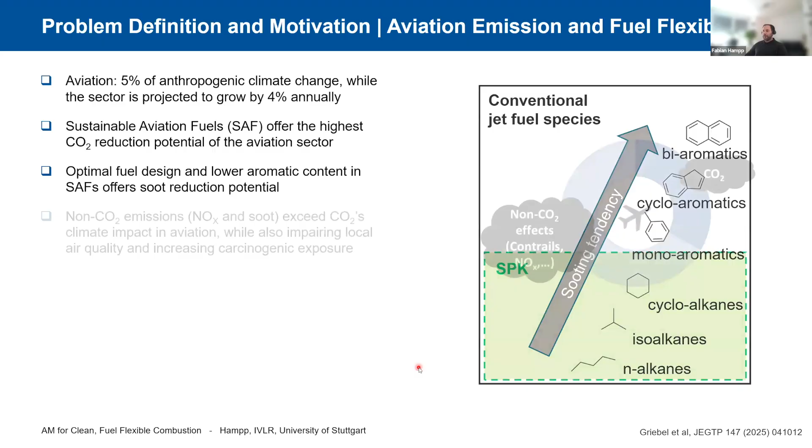This is quite important because it's well known that non-CO2 emissions basically exceed the CO2 climate impact in aviation, but this also affects or impairs local air quality and increases carcinogenic exposure. When we use SAF, also hydrogen, that still leads to contrail formation and NOx formation. So using SAFs alone doesn't make aviation climate neutral.

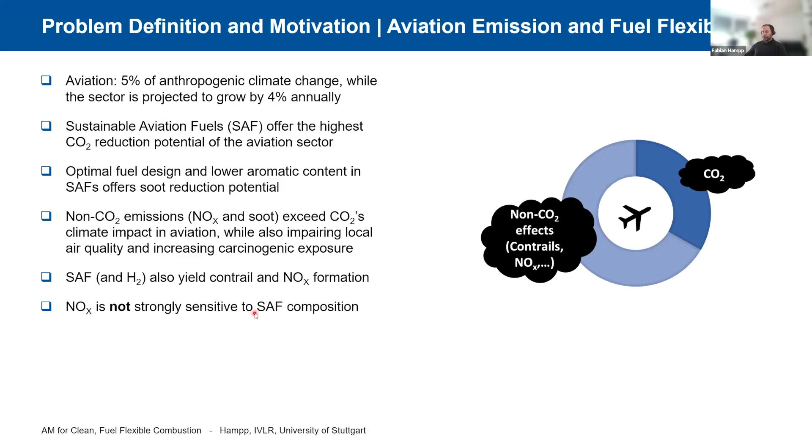In order to mitigate, in particular NOx, we need technology advancements. NOx formation is not strongly sensitive to the SAF composition, so when you remove, for example, the aromatic content, the temperature is still high, you still form thermal NOx and so on. The same holds for hydrogen. So for reducing NOx, we really need technological innovations.

The second side I want to motivate is the use of additive manufacturing in combustion systems, in particular because modern combustion systems are often additively manufactured. For example, the Siemens SGT 600 or 800, or also the CFM or GE LEAP engine fuel nozzle. The motivation here is often a reduction in part number, weight, and also manufacturing time.

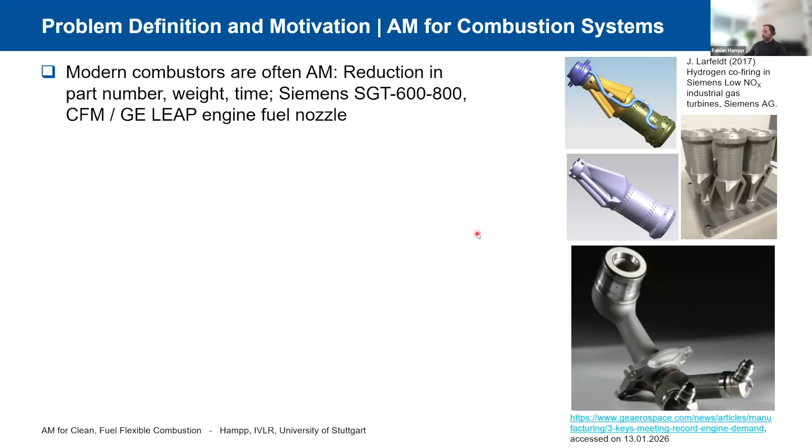But additive manufacturing can go significantly further. Here I show an image of a multi-material printing process, borrowed from Fraunhofer, where they combine the printing of copper with stainless steel to combine enhanced heat transfer and structural integrity.

This can go even further, up to in situ alloy generation. Basically you fuse or blend powders, or create new powders, and then really create, in the printing process, new alloys tailored for their functionality in the position where you place them.

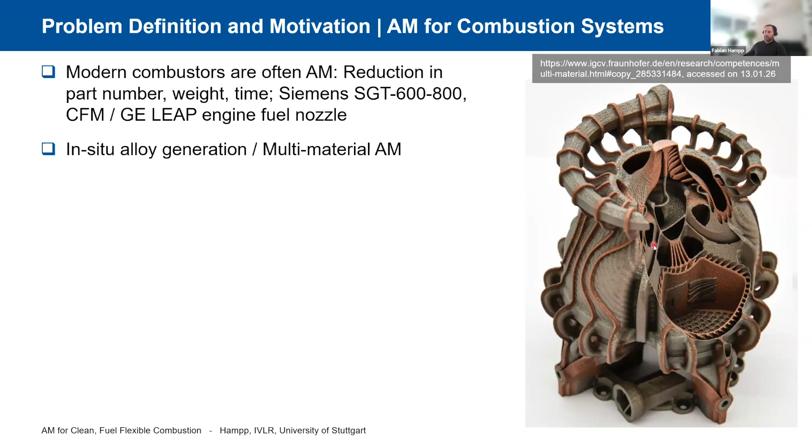Additive manufacturing is also heavily used for repair of in-service components. This is more direct energy deposition, where we basically rebuild turbine blades or compressor blades to fix them.

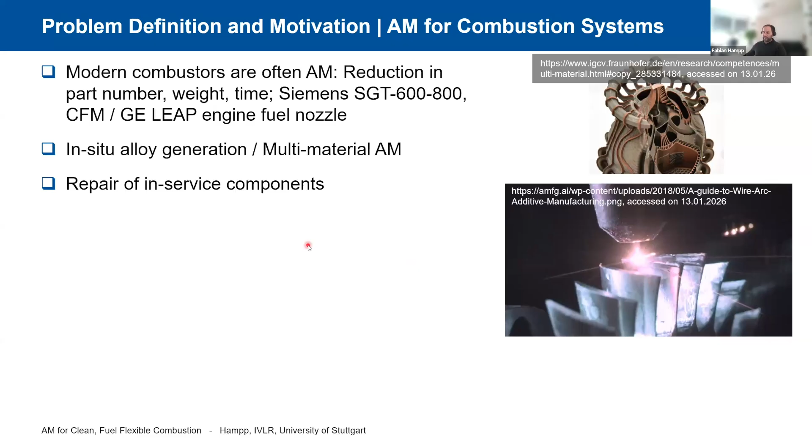One big area I want to highlight is function integration, particularly the DFG-funded SPP 2419 HyCAM project run by Heinz Pitsch, where we have a sub-project. This overall project focuses on the use of additive manufacturing for hydrogen carriers, with a wide range of projects focusing on performance gains via geometric optimization.

Our project is also focusing on utilizing enhanced surface roughness to activate ammonia cracking. But what I want to focus on today is basically the use of additive manufacturing to enhance mixture homogenization, fuel flexibility, and also mitigate emissions.

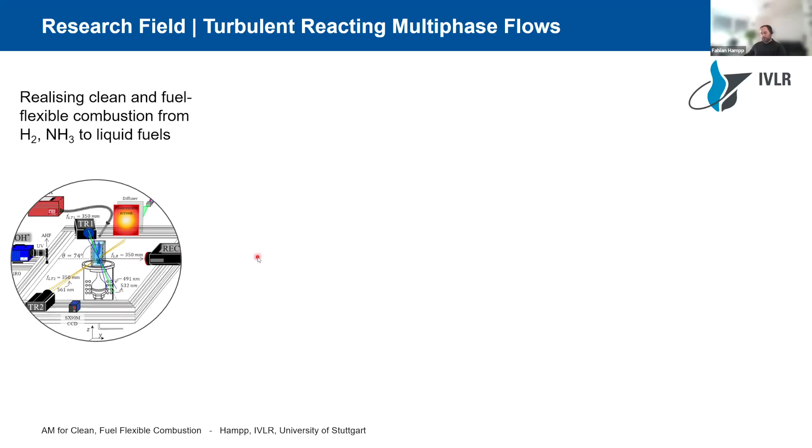The research field we work in is a bit wider, so we focus in general on turbulent reacting multi-phase flows. We want to realize clean and fuel-flexible combustion, ranging from hydrogen and ammonia, with particular focus on liquid fuels. We advance fundamental understanding and use advanced manufacturing technologies to optimize injector hardware, designing flow components to allow us to decouple physical processes better, to end up with cleaner combustion processes.

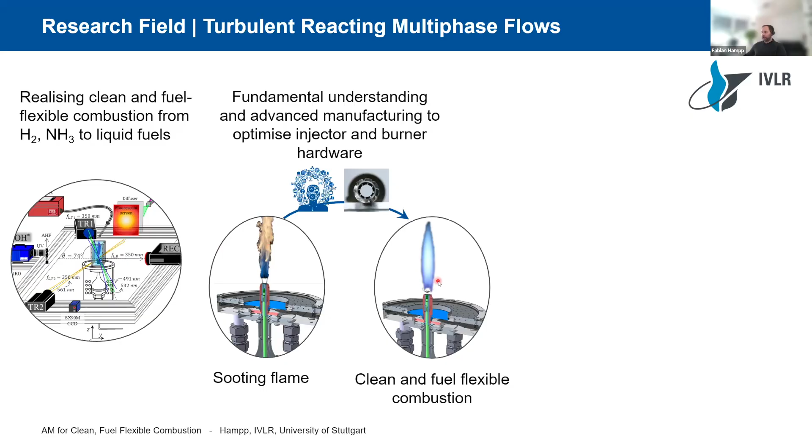For this purpose, we use a lot of laser-based diagnostics that produce a lot of data. In order to post-process this data and advance this post-processing, we develop deep learning-based methods to support the data analysis of image-based diagnostics predominantly.

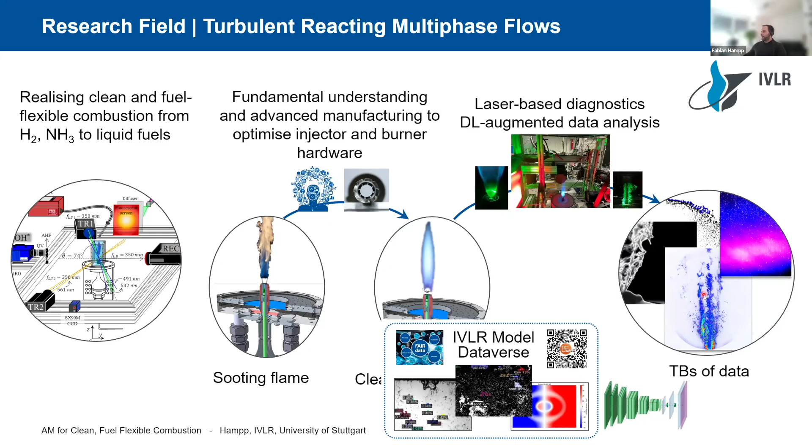But the focus of today's talk is basically on this additive manufacturing side, the way we use it to optimize combustion systems. So before we deep dive into the content, I want to introduce quickly additive manufacturing and then focus on...

...the experimental work we do and show you some examples of injection systems that we have developed over the past. Then in the end, I will highlight where I see the emerging challenges for the use of AM in combination with combustion.

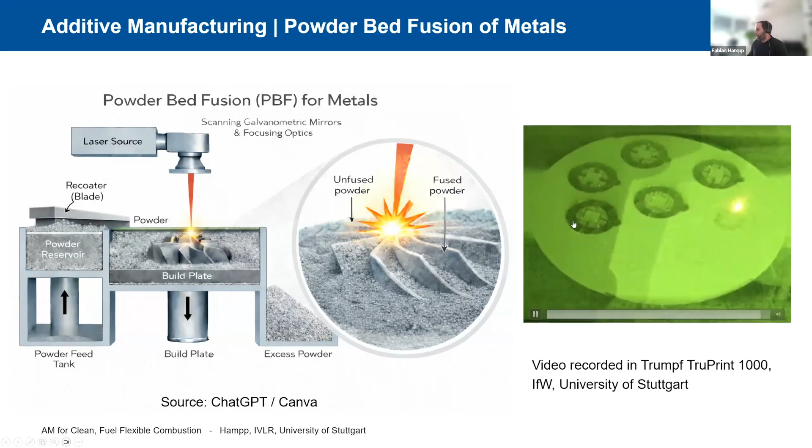Good. There are a couple of inherent problems with that, in particular when it comes to smaller scale structures. The inaccuracies I'm going to talk about now always assume that you already have a good additive manufacturing process, so a stable melt pool.

On top of that, you have partially melted particles, so partially fused powder material sticking to the wall, enhancing the surface roughness. The second part is tolerances.

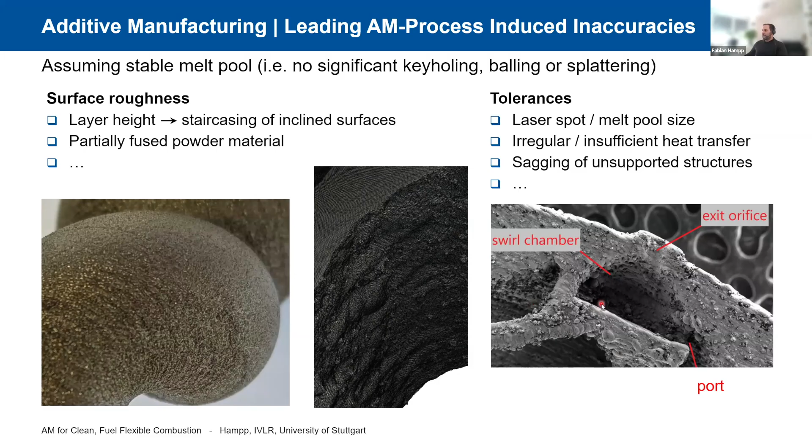And why is this important? I just want to give you a rough idea of the precisions we talk about in additive manufacturing powder bed fusion. For solid structures, in order to create a wall, you need roughly 2 to 4 melt pool widths. This leads to a minimum wall thickness usually above 500 micrometers. These numbers are really just to give you an idea of the range we're talking about.

And for channels or internal structures, the quality or accuracy is heavily dependent on the build orientation. So vertical holes, you probably get a much better quality in comparison to a horizontal channel, due to this sagging and unsupported structures.

Typically, the dimensions are also bigger than 500 micrometers, and every channel that is bigger, or especially horizontal channels bigger than 5 to 10 millimeters, needs support typically. When we talk about injection systems, this can become problematic because usually you have multiple injection orifices fed out of a single plenum. You have complex internal structures that you can't post-process, can't machine or sandblast, and you have high flow velocities through these orifices, making it sensitive to dimensions.

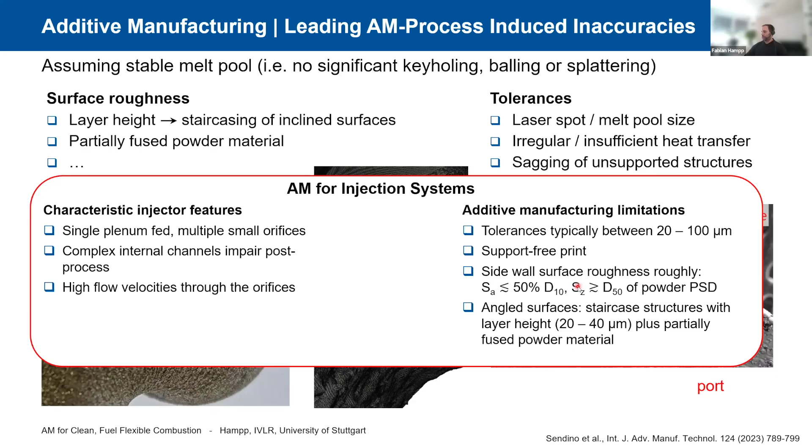That's not uncommon. And when you have an angled surface, on top of the surface roughness you also have the staircasing effect with the layer height, and typical layer heights are between 20 or 40 micrometers, depending on the optimization of the build process - they can also be higher. When we have an injection orifice of 200 micrometers with a tolerance of 20 micrometers up and down, that leads to an area uncertainty of 50%.

That's problematic because, of course, if you have one pressure in the plenum, and now we have a variance of the injection orifice that varies 50% in area, that leads to significant differences in fuel being ejected through these orifices. That inherently impairs mixture stratification, leads to elevated non-CO2 emissions, and is challenging to reproduce because in the next part, presumably, these inaccuracies will be distributed differently.

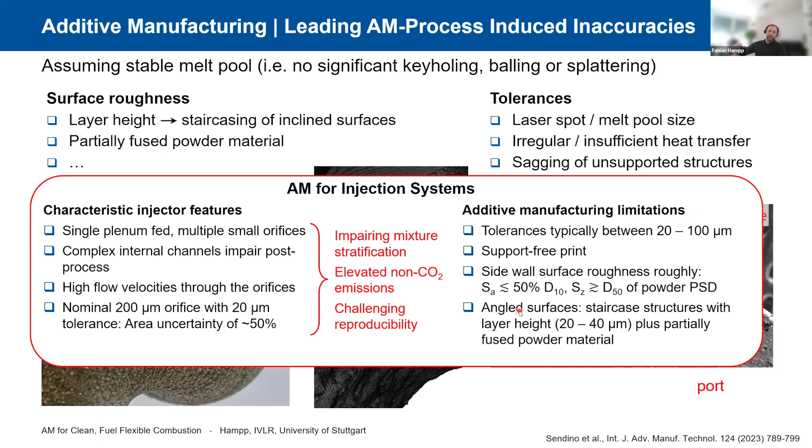But you can detune this angle to 45 degrees or 90 degrees, and then you end up with some sort of structure in this build layout.

The second parameter that we vary a lot is the hatching distance - that's the distance between the laser path lines. Typically, if you want a solidified part, they overlap and you create a solid part. But when you detune that and open the space between them, you create gaps. In combination with hatch distance and rotation, you can basically tailor the permeability vector.

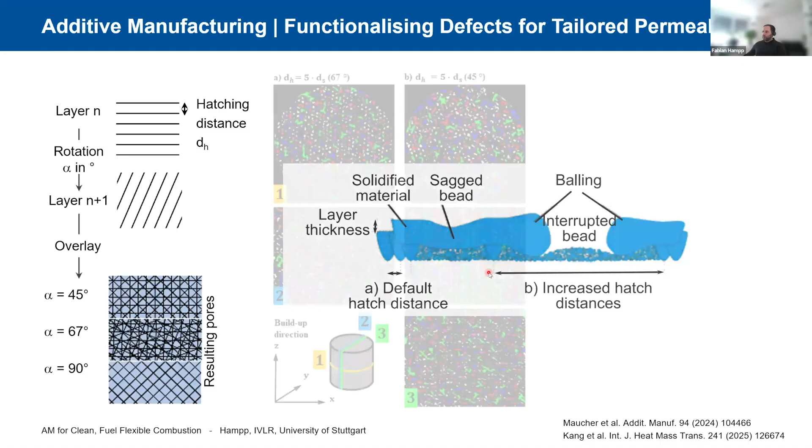You can direct it. For this, I'll show you a few micro CT images. Here you have a scan strategy of 67-degree rotation and here 45-degree with a hatch distance of 5 laser spot diameters. You can already see by the interconnected colored regions that with a 45-degree rotation, the connected pores are much larger compared to the 67-degree approach. When we increase the hatch distance, we can create really large interconnected pores, and that creates permeability that is directed in these structured approaches.

This is what we use later on in designing the new injection systems.

Let's move to the combustion side. I will introduce the burner framework and experimental setup next. We typically use jet stabilized combustion systems, highly turbulent jet flames, approaching the flow conditions of high momentum jet stabilized combustion systems. The way this works is you have air penetrating at high velocity into the combustion chamber. The combustion nozzles are placed off-centered, which creates space for a large internal recirculation zone that transports heat and radicals back into the shear layer, and it's entrained into the shear layer, leading to some sort of auto-ignition influenced flame stabilization.

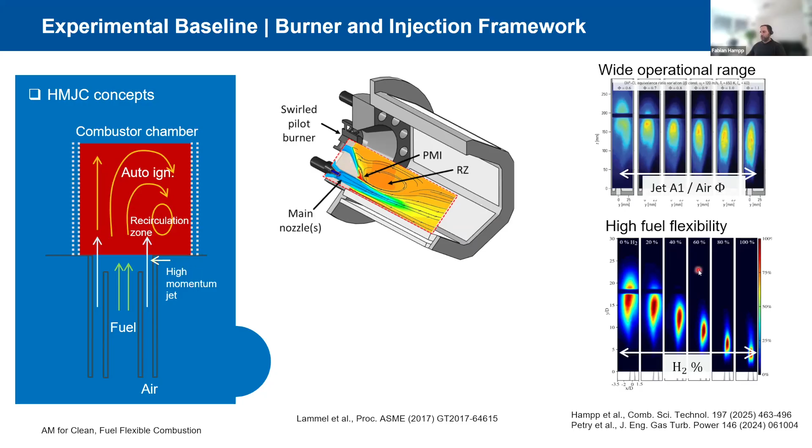We choose this combustion concept due to wide operational range and wide fuel flexibility with simultaneously low emissions. Here you see a Jet A1 flame for varying equivalence ratio, and here a hydrogen or natural gas enriched hydrogen flame, or methane enriched hydrogen flame. The flame stability is very comparable - the flames are always lifted, and you can operate the same burner from hydrogen to heating oil and kerosene.

When it comes to the injection systems for these types of combustors, these are rather challenging because you need to split up the fuel mass flow rate into a large number of nozzles. So instead of having one injection system for a given thermal power, you now have 12 or even more injection systems, and that makes it rather challenging to produce these.

In terms of liquid fuels, we use jet and cross flow injectors either as a direct injection system, as a pre-filming system, or as air blast systems. For gaseous fuels, we typically use jet and co-flow or jet and cross flow injection systems. These are quite common, and they're also mostly additively manufactured, but there's nothing extraordinary about these except for maybe the geometry.

We use additive manufacturing in this micro print approach to develop new types of injection systems with the motivation to enhance fuel flexibility, load flexibility, and also scalability.

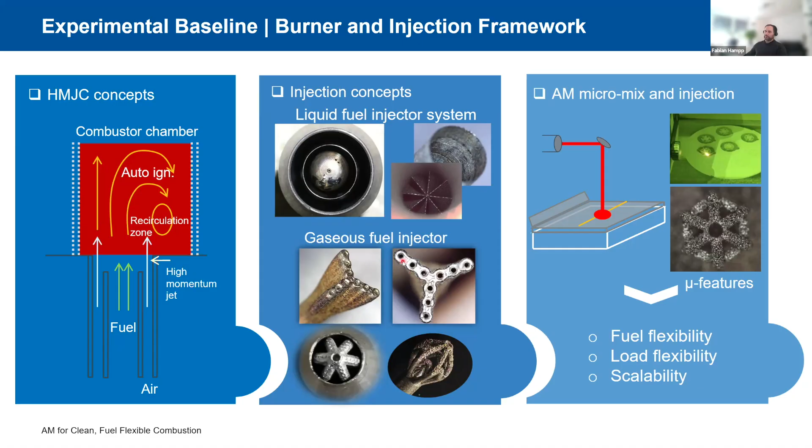With this, I would now like to introduce the burner configuration. As I said, it's a turbulent jet flame. In our burner it's a piloted turbulent jet flame. We have the preheated combustion air coming up in this channel. We have in green the fuel supply lance, on top mounted an injector. Here you have an air blast wall installed in blue surrounding the injector, and then in red you have the combustor nozzle. Down here you have a porous plate that anchors the pilot flame, which is then surrounded by shield air. I think this will become clearer when I show you some images.

The flow conditions we operate at are typically between 30 and up to 160 meters per second bulk velocity. The temperature of the air varies between 300 and 800 Kelvin.

The fuel is supplied by nitrogen pressurized piston cylinders that make it fluctuation free. The fuel supply lance is water cooled up to this point to maintain the physical fuel properties constant. The fuel mass flow rate can be varied over a wide range, from let's say 0.05 grams per second to 1.2, although we can also go higher and somewhat smaller here as well.

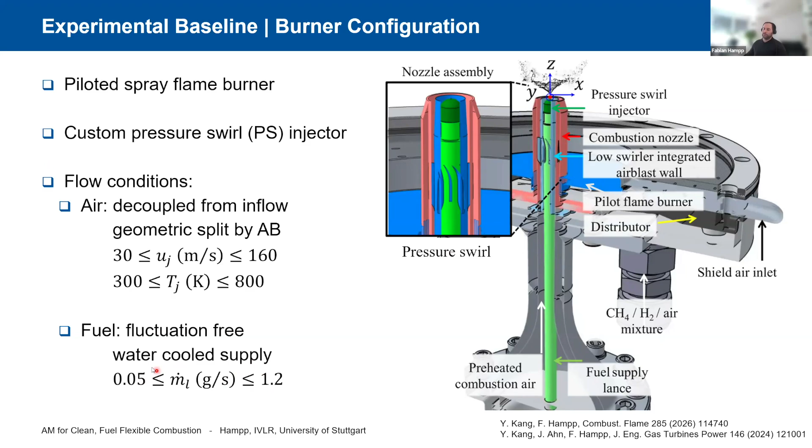Before I start with the way we use additive manufacturing concepts in this type of burner system, I would like to introduce or explain the overall injection system.

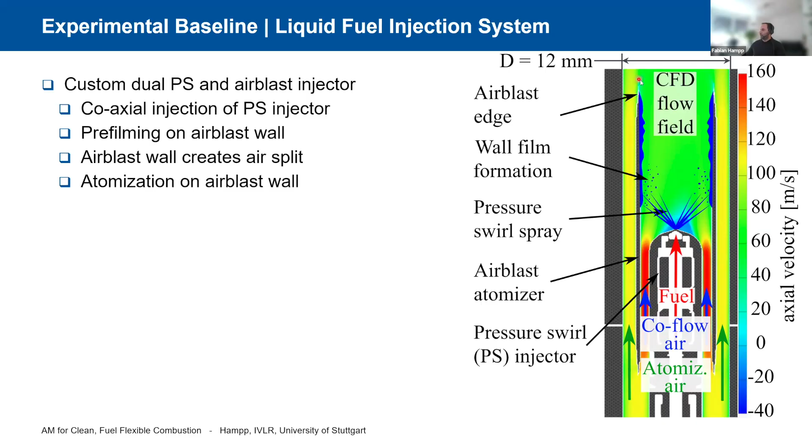So we have the pressure swirl injector here that creates a hollow cone spray and pre-films a wall. This wall film is then driven up by a co-flow air going past, meeting an atomization air at the air blast edge, and the flow rates are adjusted so that you have high shear leading to this air blast atomization. It's a very modular design, so we can exchange the injection system, vary the mixing length—the distance between this edge and the combustor nozzle exit—vary the length of the film, and vary the air flow guiding system around these injection systems, and also upstream of that.

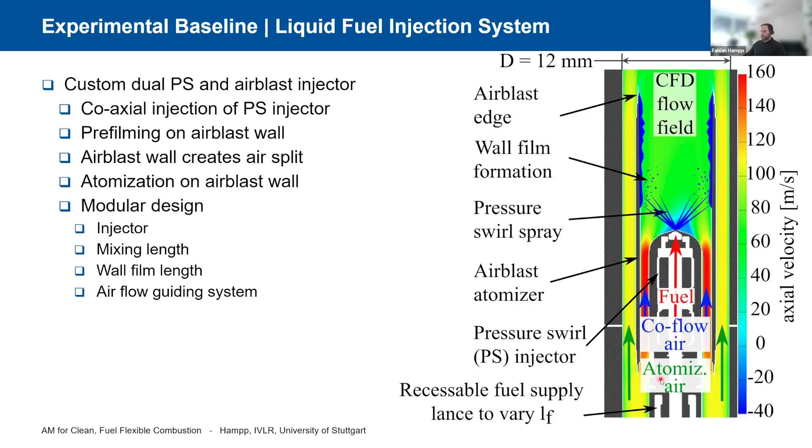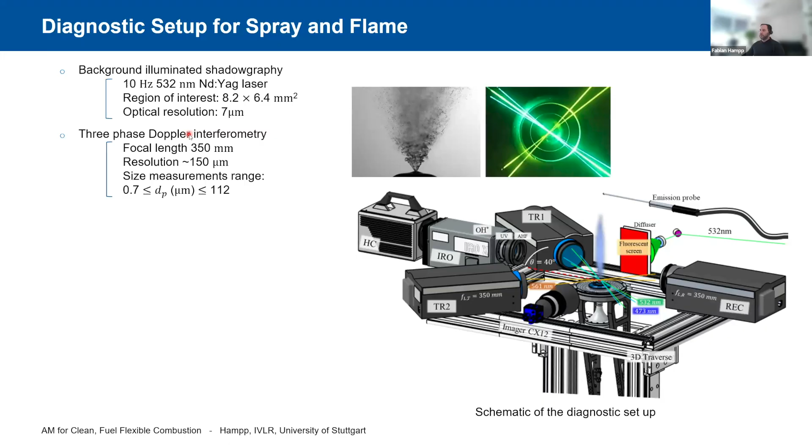In terms of diagnostics, let me give you a quick introduction to the baseline diagnostic system that we use. We use background illuminated shadowgraphy to quantify the primary atomization. We use three-phase Doppler interferometry to measure droplet size statistics and also droplet velocities. We measure high-speed and low-speed OH chemiluminescence to detect the flame position and flame anchoring process. And we measure NOx or exhaust gases with an emission probe.

We also use more sophisticated laser setups, from phosphorescence-based PIV to do thermographic measurements. We use laser-induced fluorescence for fuel vapor, OH, and soot precursors. We are in the process of setting up LII, but this will take a little bit more time. The current talk will focus on the kind of diagnostics that I've shown here.

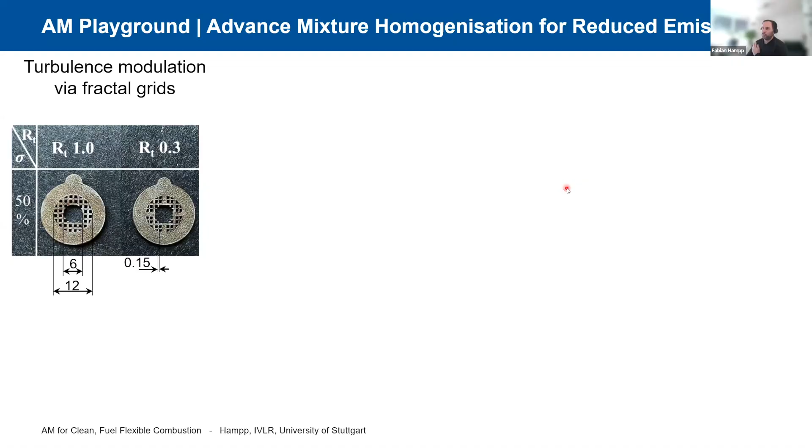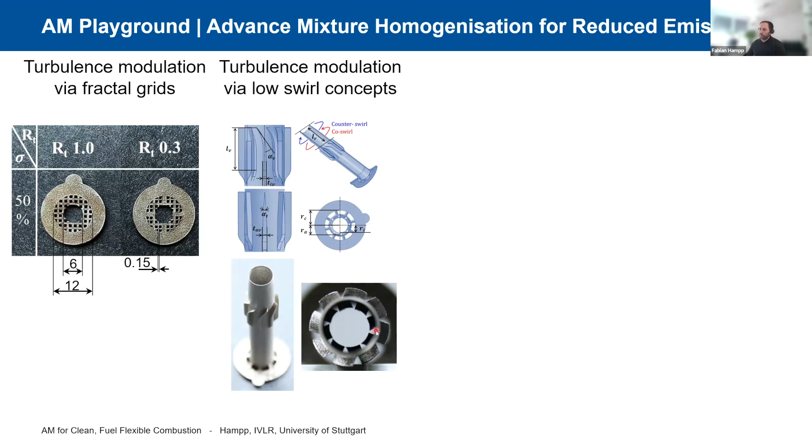Coming to our additive manufacturing playground, bringing it all together: the first part will focus on the way we use additive manufacturing for turbulence modulation via either fractal grids or low swirl concepts—here we only insert a component that changes the airflow around the injection systems. The second part will then focus on the additively manufactured injection systems, an injector that we call AM Flex injector, fully printed, and in the last part, space filling injection systems.

A quick disclaimer here: all additive manufacturing parts have been produced by the Institute for Machine Tools, IFW, at the University of Stuttgart, an institute that we have collaborated widely with for a number of years now.

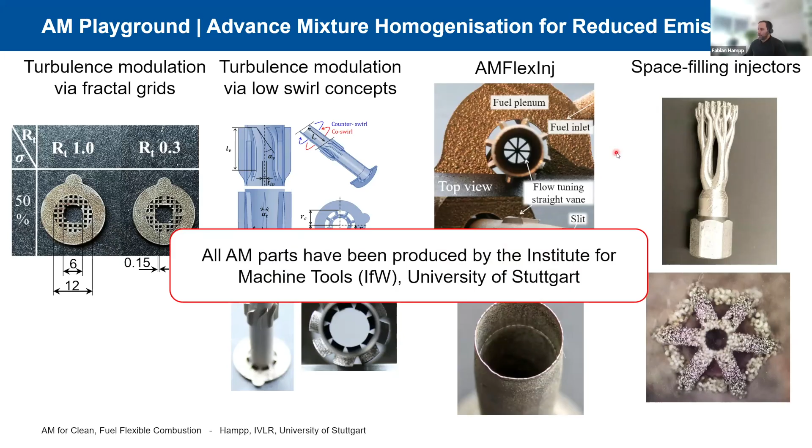I now would like to start with these low swirl concepts to focus on spray stability. The connection to additive manufacturing here is the way we use these concepts to enhance fundamental understanding in order to make these sprays more robust.

We have a number of configurations manufactured. We have a pressure swirl injector here, and this blue component is the one that is additively manufactured. Now we vary the vane angles of only the inner vanes, so we swirl the inner air going past the injection systems, either in co-swirl direction or in counter-swirl direction with respect to the pressure swirl spray. The swirl numbers are really low, below 0.3. The objective here is just to stabilize the sprays.

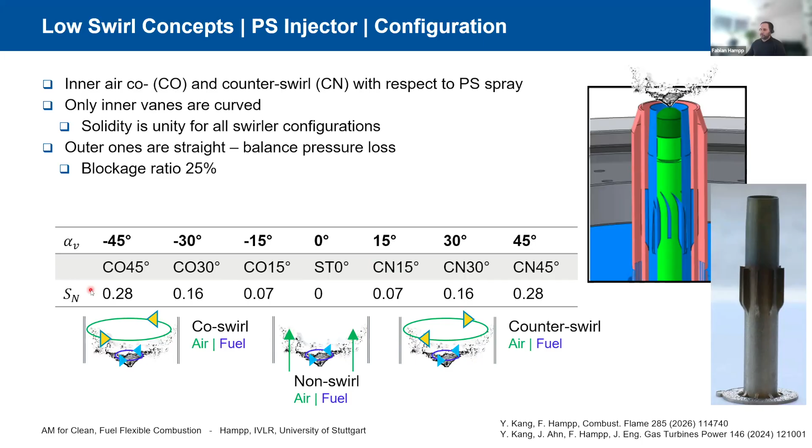I'll quickly show you the global spray and later on flame patterns. In the straight vane case without swirl, the sprays really open up. You have a relatively large spray angle; the nominal spray angle here is 90 degrees. When we introduce low swirl in either direction, the spray angle becomes much closer to the normal design point.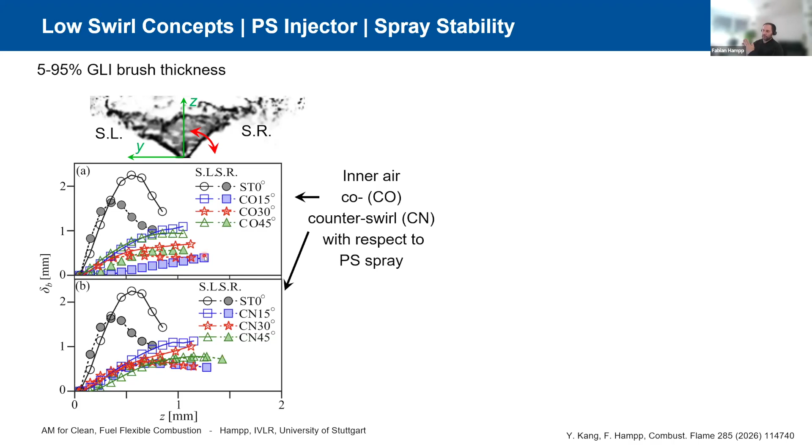We looked at this further and also looked at the break-up point, the final point of the interconnected liquid sheet, and tracked this point in space. Here you have the co-swirling cases in the top row and counter-swirling cases in the bottom row. The black lines are the straight vane, non-swirling cases, and the colored parts are the swirling cases, separated into left side and right side. What you see is that with swirl, the break-up point stability becomes much more fixed in space.

The distribution reduces a lot. This is quite an important property because the break-up point in space basically dictates the droplet ejection velocity and therefore fuel placement, and therefore strongly influences mixture stratification.

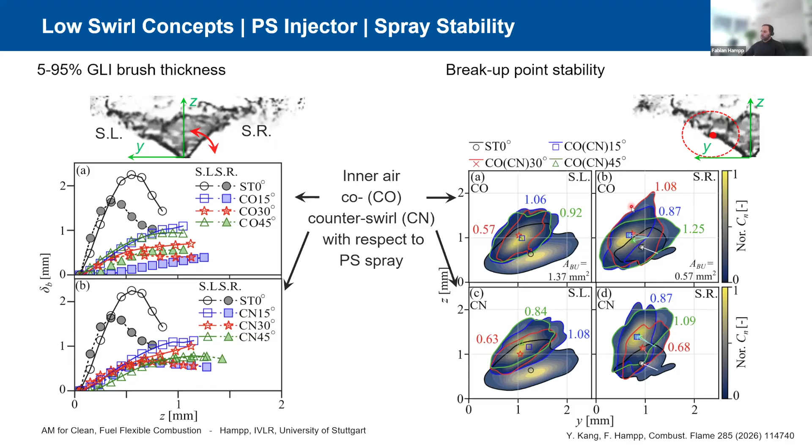We also measured droplet size statistics, and it's very similar. Color coding stays the same: black is the straight vane case, and colored is the low swirl cases. When we introduce low swirl, the droplet sizes decrease, but more importantly, the distribution of droplet sizes and number density becomes more symmetric, and the fuel distribution or penetration becomes radially broadened. These are all attributes beneficial for mixture homogenization, which in turn leads to reduced emissions or non-CO2 emissions.

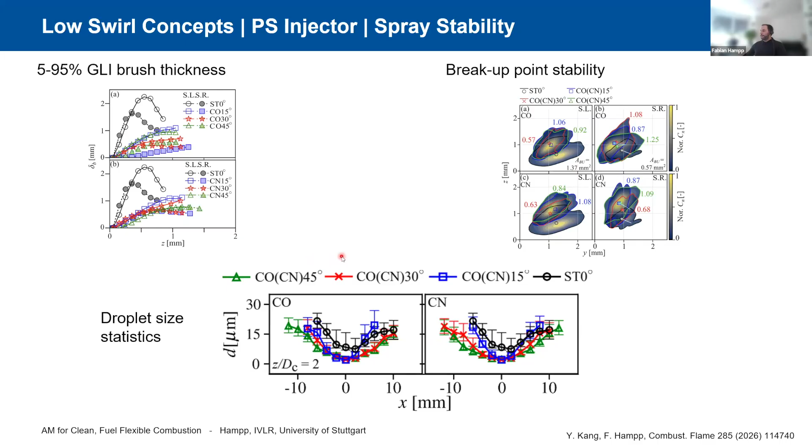With this understanding, we now basically recess the injector into the air blast wall and use this more symmetric, more stable spray to create a film. And with a more symmetric primary spray, I create a more symmetric or more homogeneous film that I then atomize.

This is directly reflected in the flame emission. So what we've seen here, the strong axial compression of the pressure swirl spray flames has been mitigated. It is still compressing it, but not so strongly.

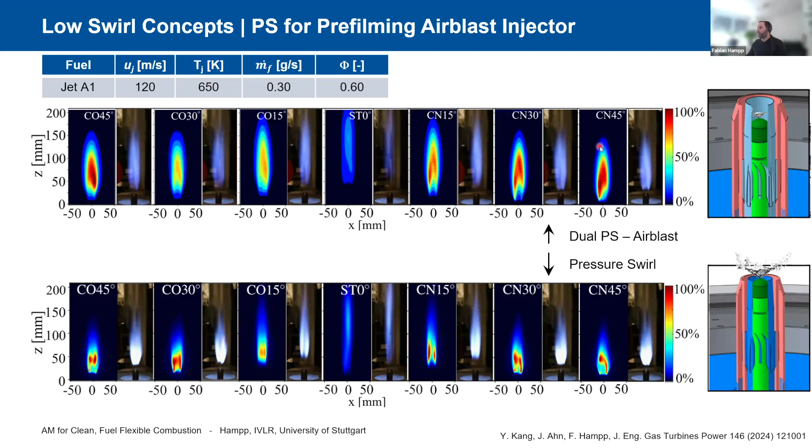We also measured droplet size. We don't see a very strong effect in terms of droplet sizing here. We have a bit broader radial distribution when we have low swirl.

But what I really want to show you is the effect on the emissions, where we now have the low swirl cases in an airblast configuration. We really drop NOx emissions from up here to down here, and that is simply by having a more symmetric or more homogeneous film on the airblast wall. So that has a big impact on the NOx emissions.

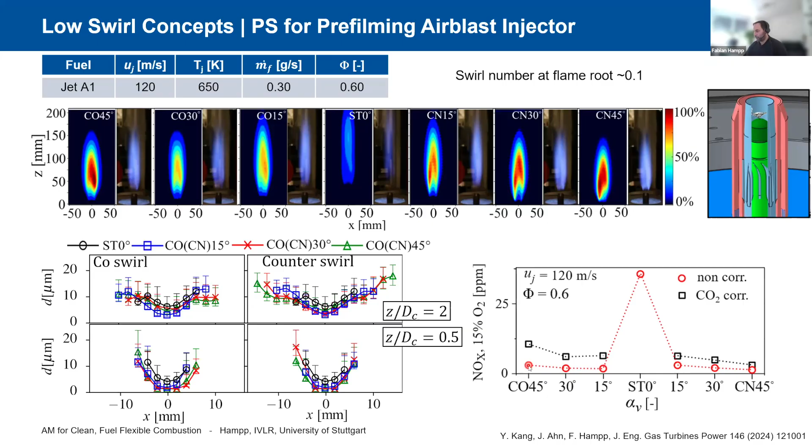I very briefly want to summarize this section. So basically, we've used additive manufacturing to create flow modulators to facilitate a systematic investigation of how low swirl influences atomization, spray stability, and so on, thereby enhancing our understanding of turbulence-spray interactions, and in the end, reduced non-CO2 emissions.

Additive manufacturing has been a real game changer in this context because it allowed us to prototype a large number of different configurations for reasonable cost. And basically, these rather simple design variations come for free because the machine just takes the CAD part and basically produces it, right? You don't have to reprogram the CNC machine.

It also helps you to reduce the modular designs. Because you can replace the entire component, you don't have to stack everything, and that eliminates a large number of assembly tolerances. I strongly believe that assembly can have a strong effect on the accuracy that we produce in our experiments.

We can enhance the flow engineering. It gives us more freedom to do stuff with our flow. It can improve the repeatability because of the reduction of assembly tolerances, and it can also improve the experimental quality. It doesn't have to, but it can.

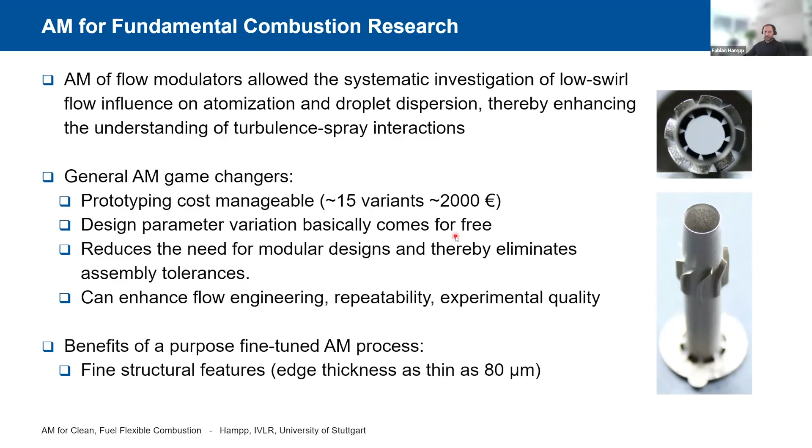Good. Coming to the second part, the way we use AM for designing new injection systems. I want to start with this multi-fuel injection system that we call AM Flex Injector. I will introduce it now, also the way we install it into the burner.

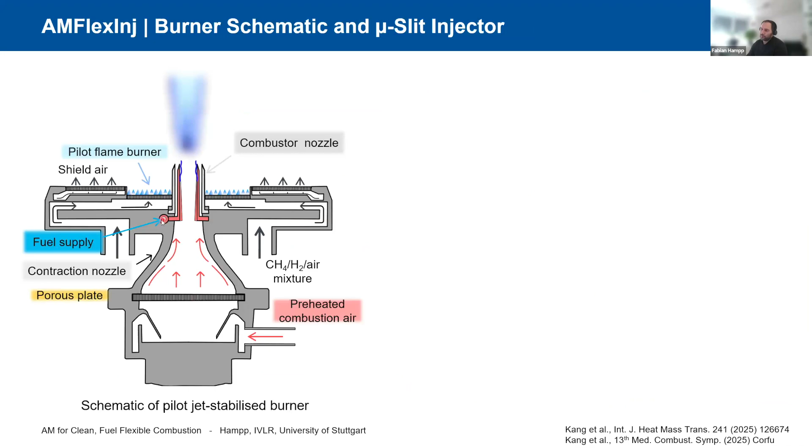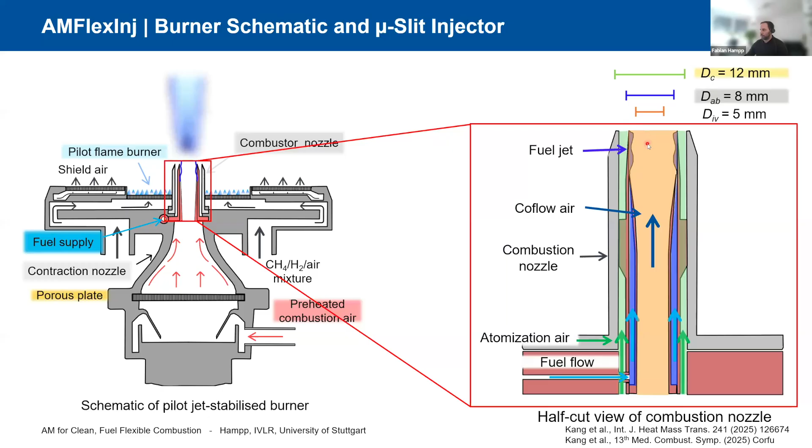So you have the same burner basically, but now the fuel is supplied from the outside through this outside port instead of the central fuel supply line. Instead of sprayed onto the wall, we directly lay the fuel onto the wall, and then we still have the co-flow air and the atomization air that lead to this air blast atomization up here. Here's the part in real life, the way it looks.

So we have the fuel coming in here, then being transitioned onto this wall. We have the co-flow in the middle and the atomization air on the outside. And here, this shiny edge basically shows you the position of the slit.

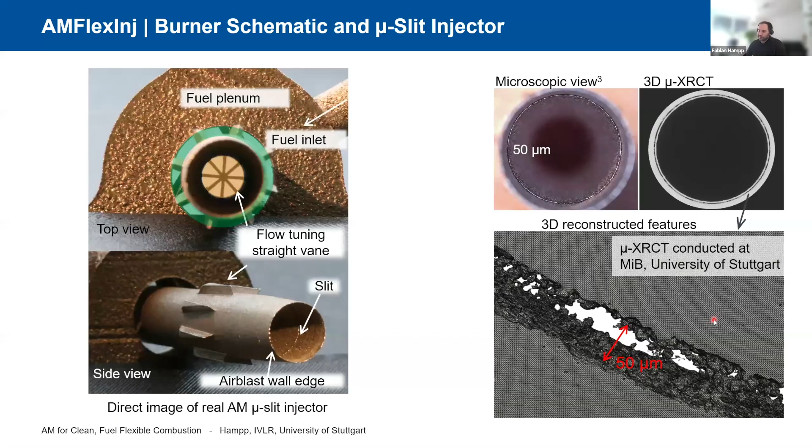The slit is extremely small. It has a nominal diameter of 50 micrometers. I will now show you some micro CT images of the accuracy, or the inaccuracies, of this additively manufactured part.

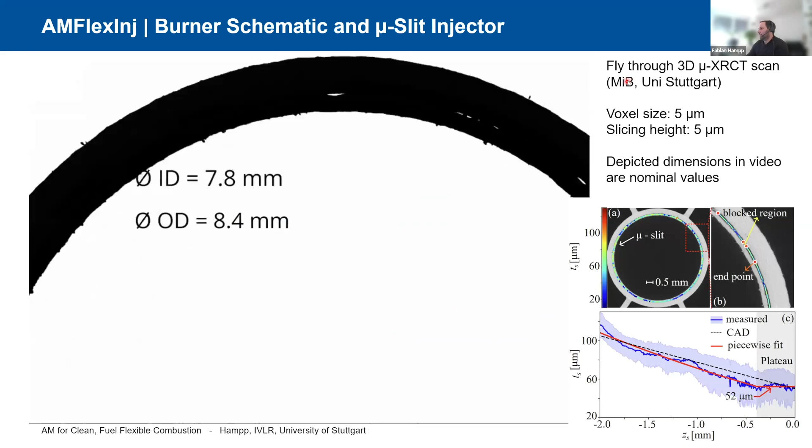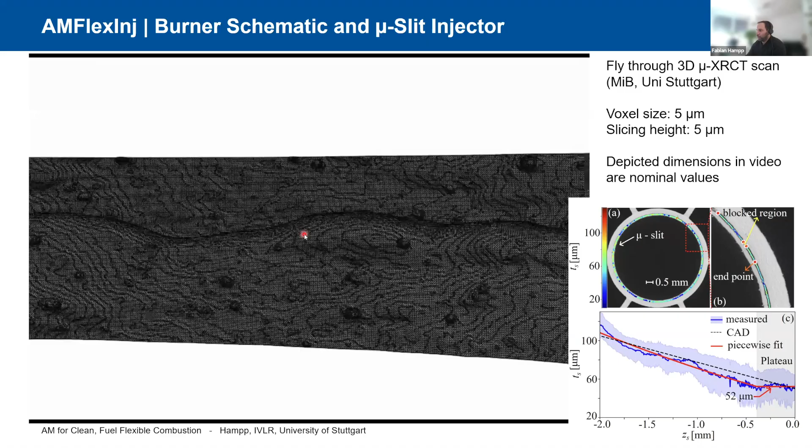These micro CT images have been conducted, or these measurements have been conducted, at MiB at the University of Stuttgart. We have a really fine scanner, and now you can see basically the structural non-uniformities of this part. You see the waviness here. You see a lot of partially melted powder here and here. You have the wall, and this is the slit basically where the fuel later on comes through.

The nominal size is 50 micrometers, but you can see that this is far from perfect. We also measured this statistically, and we do have a mean close to 50 micrometers, but the variance is really strong — like plus or minus 15 micrometers.

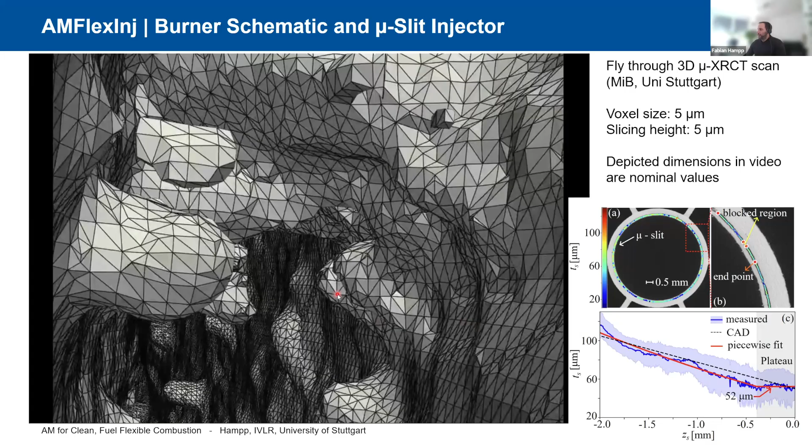This is something you can't really change. You have to live with it if you want to use this kind of manufacturing process for these small structures, but it gives you a lot of flexibility as well. I'll show you the performance now and explain why we think this has worked.

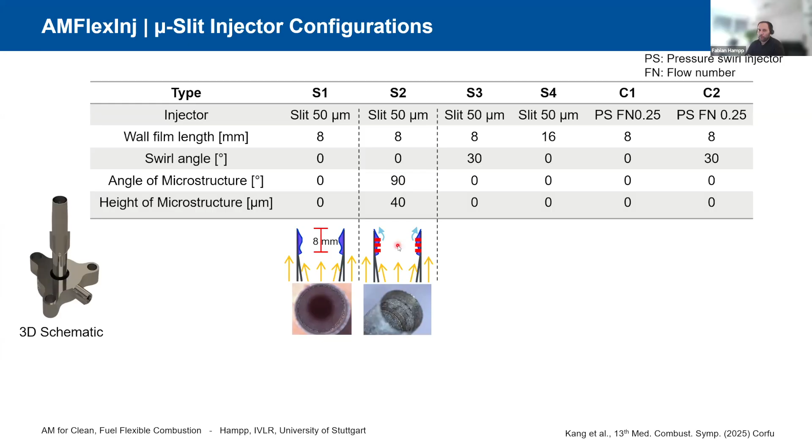For example, slit injector S1 has a film length of 8 millimeters. Then we have S2, also 8 millimeter film length, but with micro speed bumps - 3 rows of 40 micrometer height structures to homogenize the film. Then we have one with a swirler, and one with a longer film length, and so on. We compare this with the conventional injection systems.

The operational range is very similar to before. We have a flow velocity variation over a wide range, and can preheat the air temperature. We operate here in the first part still with Jet A-1. Later we expand the fuel matrix, and have a wide range of liquid mass flow rates.

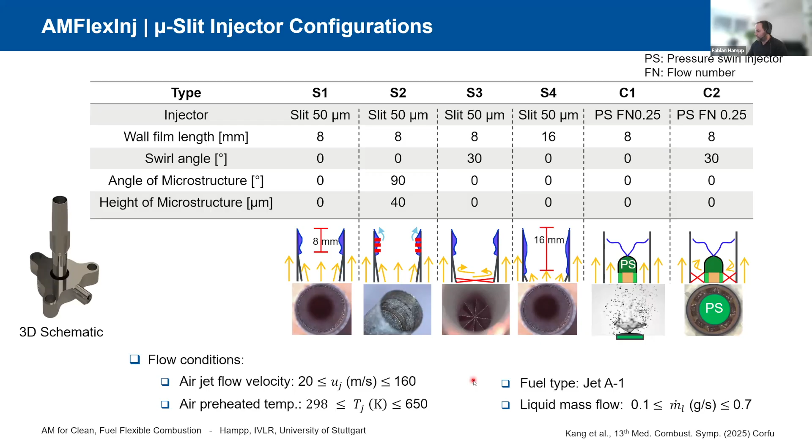I want to show you the way we characterize the sprays quickly. So we have here these shadowgraphy images, high resolution shadowgraphy images. Here you see the liquid film penetrating into the air, and this is the air blast edge.

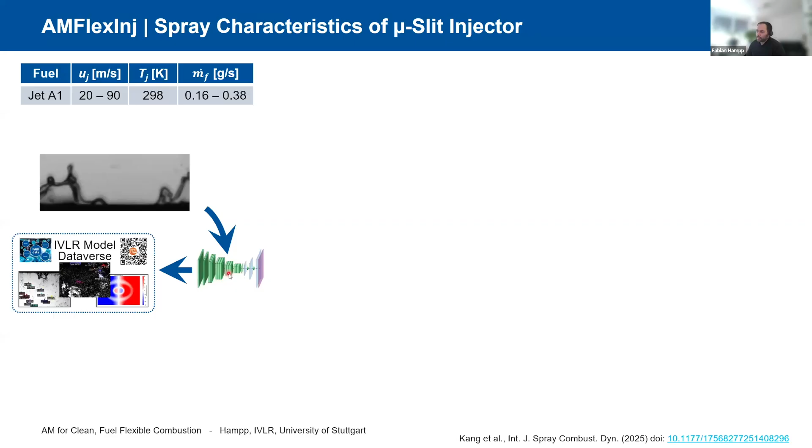Then we employ our machine learning based detection, which is publicly available and can be used. We detect the free film penetrating into the combustor. I hope this video shows a bit more fluently on your side - it's a bit lagging. With that, we calculate the free film penetration depth, for example.

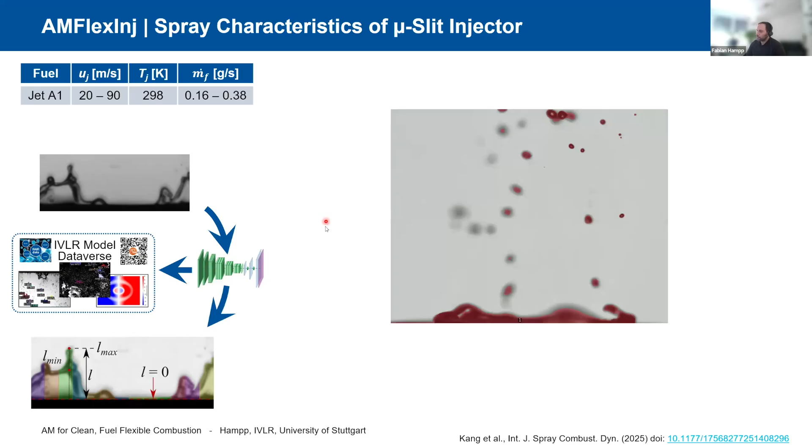Here I show you first some instantaneous shadowgraphy images for a constant fuel mass flow rate at varying air bulk velocity, from 20 to 90 meters per second. Then we analyze this statistically to measure the liquid penetration depth away from the combustor, from the air blast edge.

With increasing air velocity, you see that the free film penetrates significantly less into the combustion chamber. We also vary the fuel mass flow rate from 0.16 grams per second to 0.38 grams per second at constant air velocity, and we see that with increasing fuel mass flow rate, we penetrate deeper.

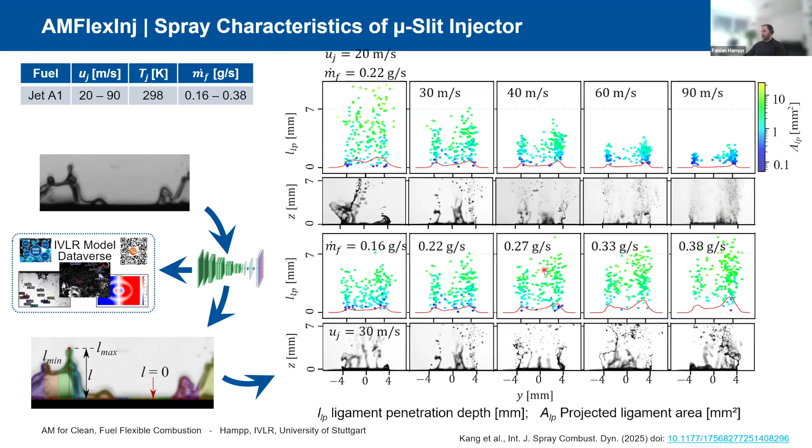The color coding is basically the area of the free film. But what is quite important to note is that we are reasonably well symmetric around the axis here, despite the inaccuracies we have with this injector.

We also measured droplet size statistics. At top, this is axial droplet velocity, radial droplet velocity, and diameter. This is the 8 millimeter film variant. Then we have one with the speed bumps, one with the swirler, and the conventional case.

What we see is that we don't see strong differences, maybe except for the swirler case where we have a radial velocity component. But the droplet sizes are really small, reasonably well distributed, actually symmetric, and so on. This is actually good - this is what we want because it allows homogeneous fuel placement.

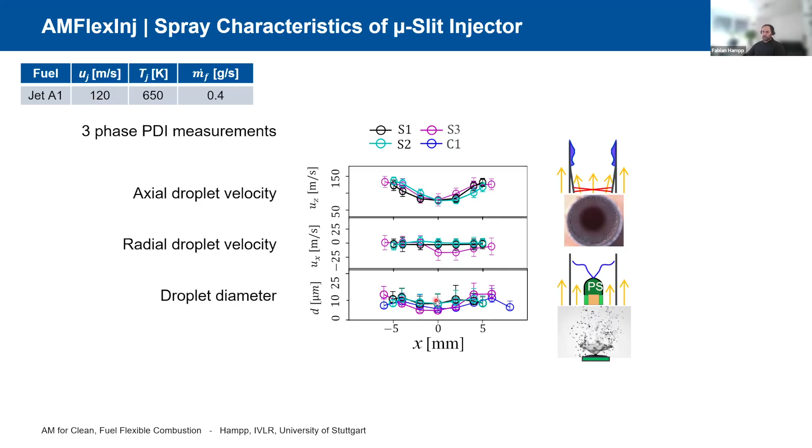To complete the picture - I see I'm a bit short on time, I need to speed up even more, sorry - this is a flame response. We have symmetric flames, and even under globally rich conditions, we don't observe much soot in these flames.

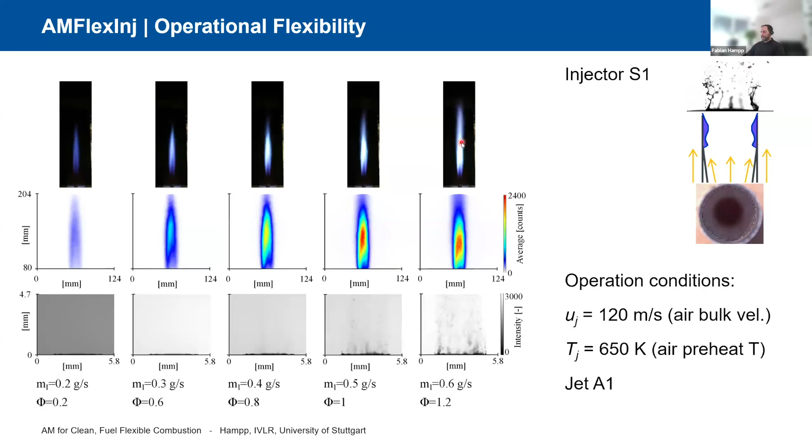We expand the fuel matrix now to Jet A-1 - or we use Jet A-1, ethanol, methane, and hydrogen - and basically use an air blast injection concept for hydrogen. I'll show you the flames for that. So we have here the Jet A-1 flame and the methane flame, and the flame anchoring process is reasonably similar for both types.

On the right-hand side, I show you now the hydrogen flame. This is more bulky and lower positioned in the center, but this is also what we expect from hydrogen type combustion in this type of burner. This is very similar to the work of Petry, where the flames are much more compressed into the center.

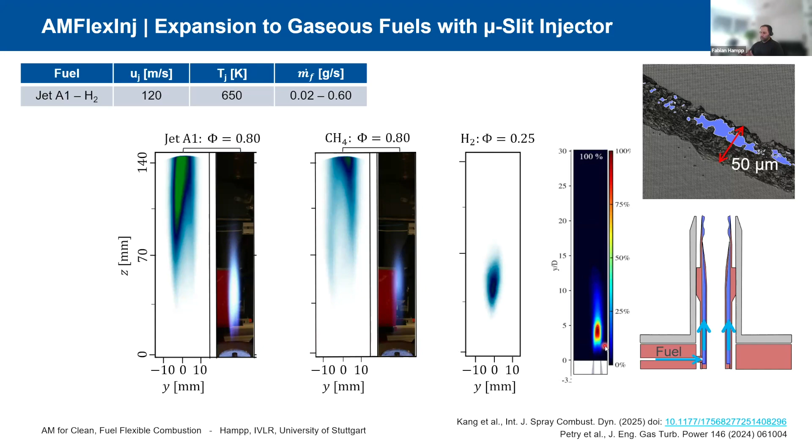The reason why this has worked is we have used a liquid fuel injection system with an unconventional large fuel port that allowed us to decouple the injection process from the physical fuel properties. The atomization and mixing is purely driven by the airflow around this injection system, not by the properties of the injection system itself. This process is very good for being produced by additive manufacturing, and has been enabled by additive manufacturing.

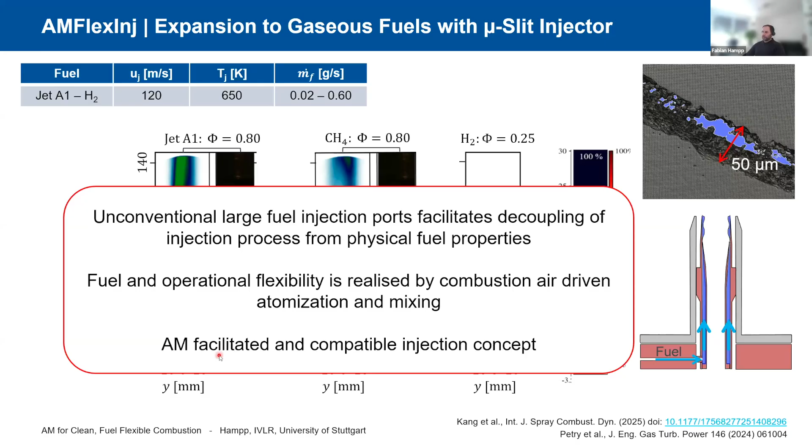The last injection system I will keep very short, but I want to show it because it's a combination of everything we have done. So it's these space filling injection systems.

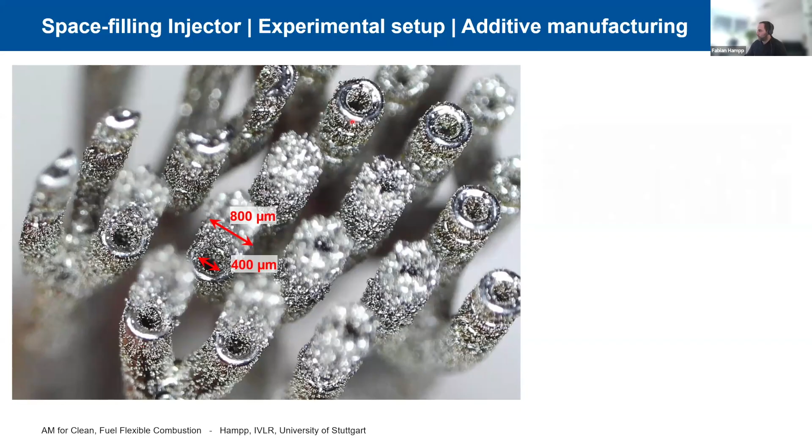On top of these tubes, they are enclosed with porous structures, or fully formed as a normal tube with a lot of 250 micrometer holes. These holes are far from 250 micrometers, but there are so many, and not randomly but quite well distributed, that the inaccuracies don't really affect the mixture homogeneity.

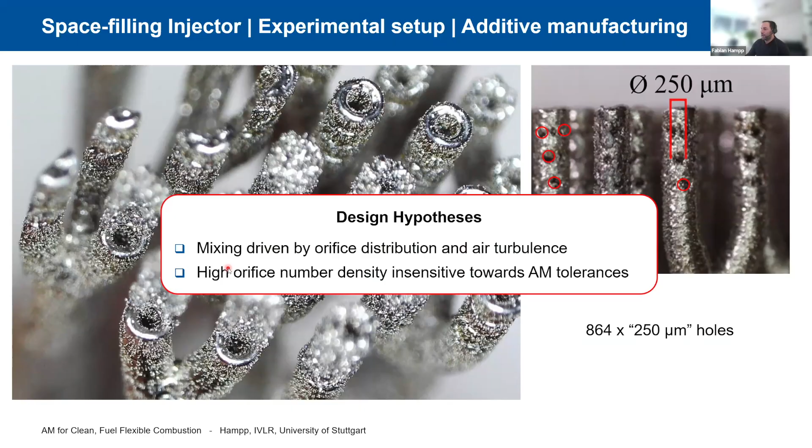So the design hypothesis behind these injection systems is that the mixing is driven by the spatial distribution and the airflow around this, and the high number of ports or orifices renders this insensitive towards the additive manufacturing tolerances.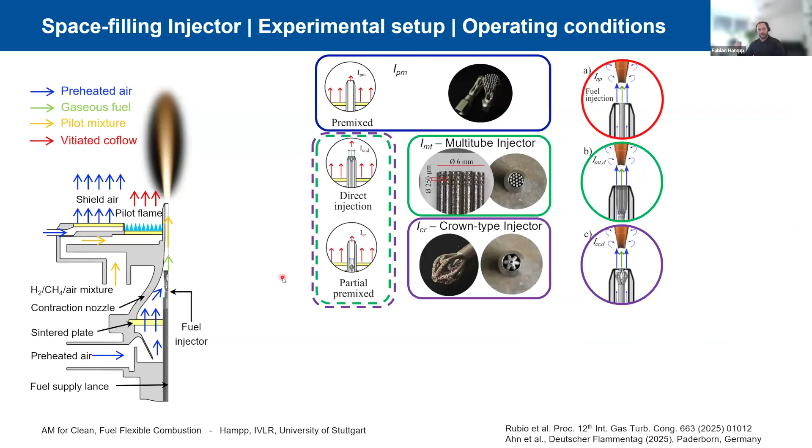So we have produced a lot of these different injectors - apologies for the speed of this. We have a number of different injection systems that we can place as a fully premixed condition, or direct injection, or partially premixed configuration.

And we measured the mixture quality with Schlieren. I want to show you the result of that. So you have here the fully premixed case, here a non-premixed case with a tube injector, and here some of these additively manufactured micro injectors.

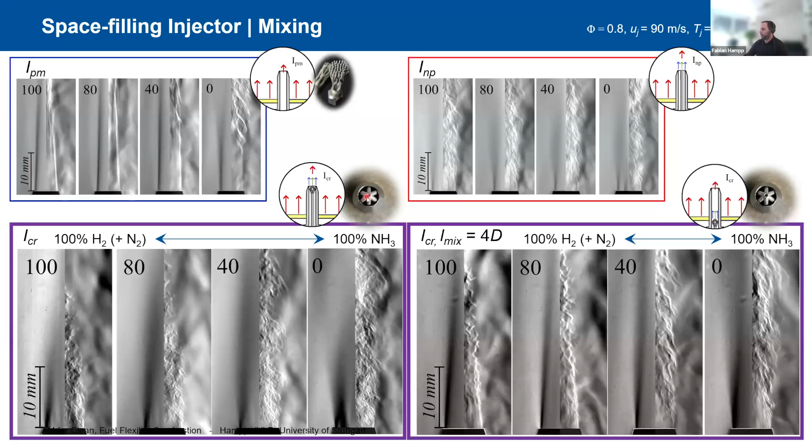What the results have shown is that we managed to achieve a fully premixed criterion very quickly, with only 2-3 nozzle diameters, for a wide range of operation conditions, and that we have decoupled the mixture formation process broadly from the fuel injection momentum and the fuel type. That is very good for fuel flexibility, because you have the same mixture homogeneity regardless of the fuel type you send through the injector.

For further information, I would refer you to this publication here where we discuss this in detail.

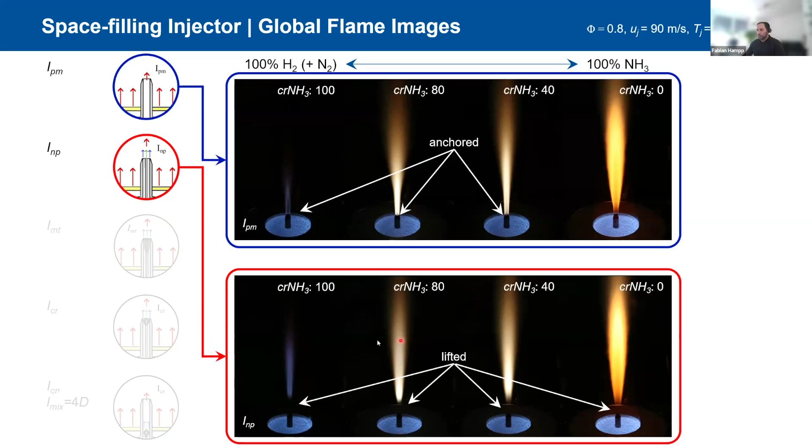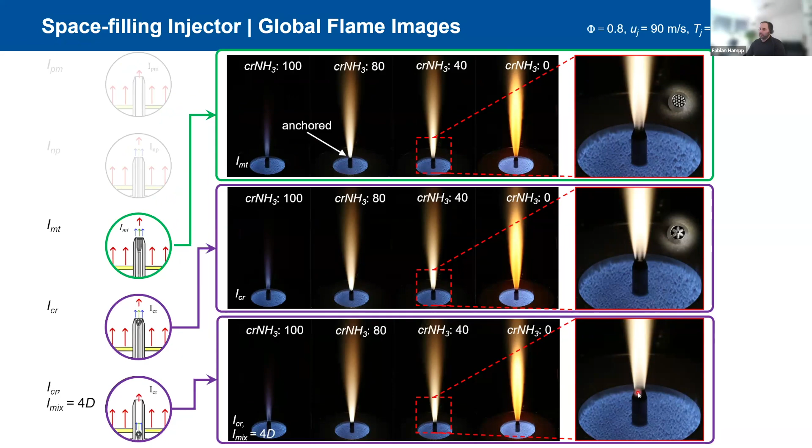Last on this injector, quickly the flame response. These are partially cracked ammonia flames, where you see the fully premixed case is closely anchored to the combustor nozzle, and the non-premixed case with the tube is lifted. When we use the additively manufactured injection systems in a direct injection configuration, we see these microstructures, but when we recess the injector 4D, we approach very quickly the fully premixed conditions.

Coming to the challenges. The obvious ones are manufacturing tolerances. They can influence the flow distribution, and you should really take care not to study an AM artifact when using that, in particular when the dimensions become small. So we have to deal with very small dimensions, but it's something to keep in mind.

The surface roughness is the second obvious challenge. This can influence boundary layer flows, boundary layer flashback. It influences heat and mass transfer - it can enhance it or deteriorate it. It influences atomization and film stability. And the surface roughness typically enhances flashback risk because it can create a local hotspot somewhere.

And also fuel coking, especially of kerosenes or heating oils and so on. This is particularly tricky when these tolerances and surface roughnesses influence the functionality, because then it's difficult to reproduce the parts - the surface roughness and tolerances are inherently somewhat stochastic due to the local powder size distribution you currently have available when you melt the parts. You can't influence that, and then it becomes challenging to validate or compare numerical work with experimental data, because no part you produce is alike if the surface roughness and tolerances affect the functionality.

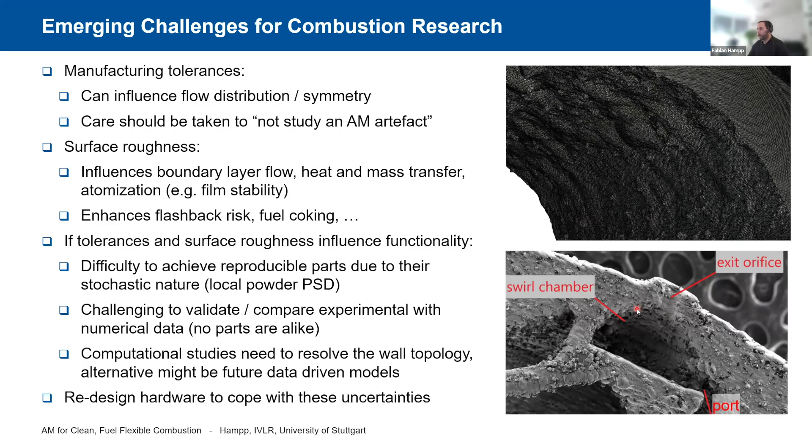One approach is to redesign the hardware to cope with these uncertainties a little bit better. The example I showed was this AM flex injector design that, despite the inaccuracies in the manufacturing, still delivered very good functionality in terms of atomization.

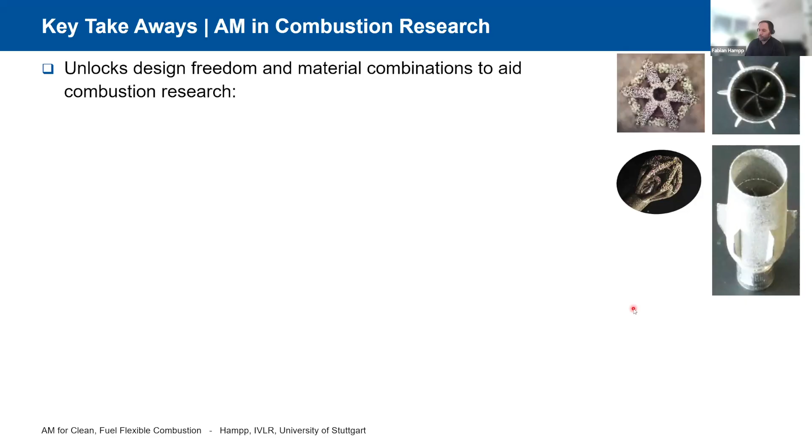Coming to some key takeaways of this entire talk: I really think additive manufacturing unlocks design freedom, and the material combinations it provides can be very exciting for combustion research, from a fundamental point of view but also from a component development point of view. So we use it to enhance fuel flexibility, to reduce non-CO2 emissions, but also to advance our fundamental understanding and innovate hardware that allows us to combine fuel flexibility and non-CO2 emission reductions.

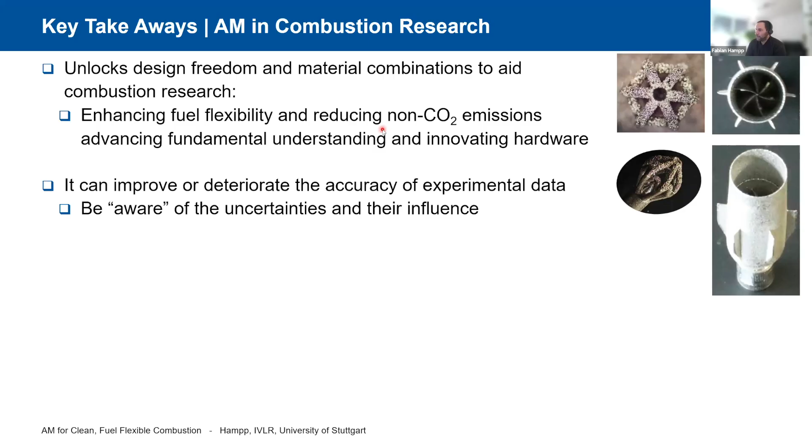It can improve or deteriorate the accuracy of experimental data. I think the most important thing is to be aware of the uncertainties you have and their influence on the flow.

Micro CT scans allow us to reverse engineer the actual part to assure build quality and that you have the part you wanted, but also to mesh the real device and facilitate numerical work. New challenges arise from surface roughness and tolerances, opening up new fields in turbulent reacting multiphase flows or combustion in general. It's very helpful to co-optimize the part with the AM process parameters, because then you can get much higher accuracy.

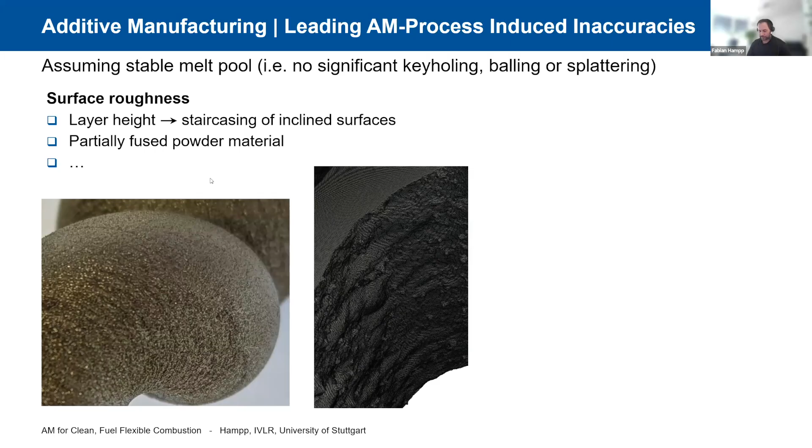Okay, in the meantime, I'll take the opportunity to ask another question. Regarding the injector you showed us, I guess you call it the space filling injector—what would be the head loss due to the presence of the orifice? Would it also be a challenge to scale up those kinds of injectors for industrial use? We actually measured the pressure loss across these.

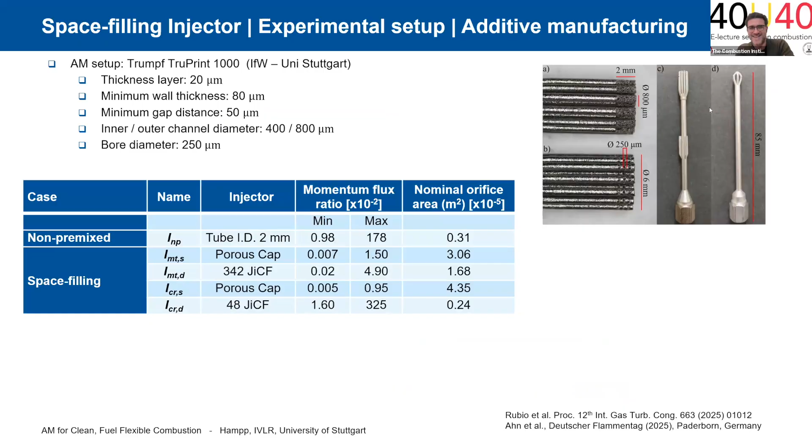In particular, hang on, I have a backup slide for that—quite good. We estimated the injection area here. We have a normal tube to supply the fuel that has a cross-section area of 3.1 times 10 to the power of -6 square meters. When we use the space filling injection system with porous caps, the nominal area actually increases, and we've seen this in pressure loss experiments as well. The pressure loss to the fuel is not really a problem; we can easily handle this.

So here you see these porous tips basically printed on these microtubes, and for a bulk jet velocity of 120 meters per second with fuel-rich conditions for hydrogen, we had a pressure loss to the fuel system of, I think, 2 bar or so. It's like nothing crazy.

And this is basically worst case scenario, right? Typically you don't run this rich, and this was at reasonably high flow velocities. The bigger problem is, but we haven't optimized for that as well, to be honest, is we have to flow the air around this injection system, in comparison to flowing around the plain tube here. And the pressure loss to the air was a bit higher, but again, not optimized for that.

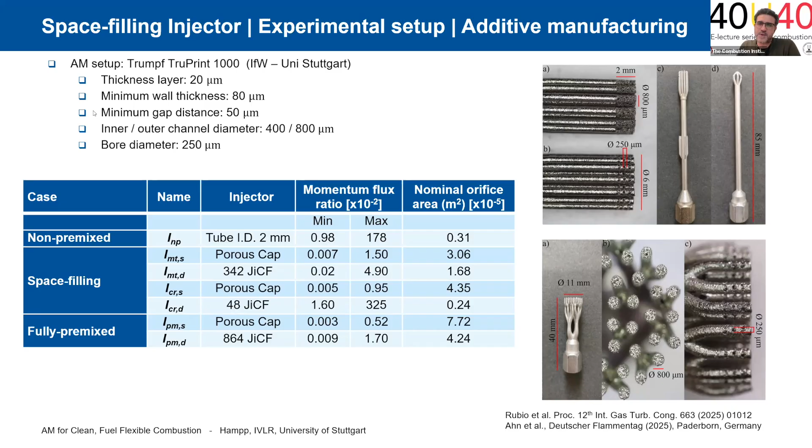Okay, thanks. And just maybe I missed it, but how do you enhance ammonia cracking with these injectors? Is it because of enhanced mixing, or are there other factors?

Yeah. So at the moment, we blend the fuels upstream. It's synthetic cracking. There is this overall project where we strive to do in situ cracking. So the material we use for printing is Inconel, Inconel 718, and one of the motivations for the project is to produce a material that is catalytically active towards ammonia at high temperatures. And the basic idea is to feed ammonia and then crack it into hydrogen and nitrogen in an additively manufactured fuel reformer that is then placed into the burner in the end.

But for now, it's still synthetically created mixtures that simulate cracking, ammonia cracking basically. So we have ammonia, nitrogen, hydrogen in a mixture. If that makes sense.

Okay. If there are no questions from the audience, can you hear me? Please, yes. Chinonso here, I'm joining from the UK. I'd like to find out, to print a complete nozzle, how long does it take?

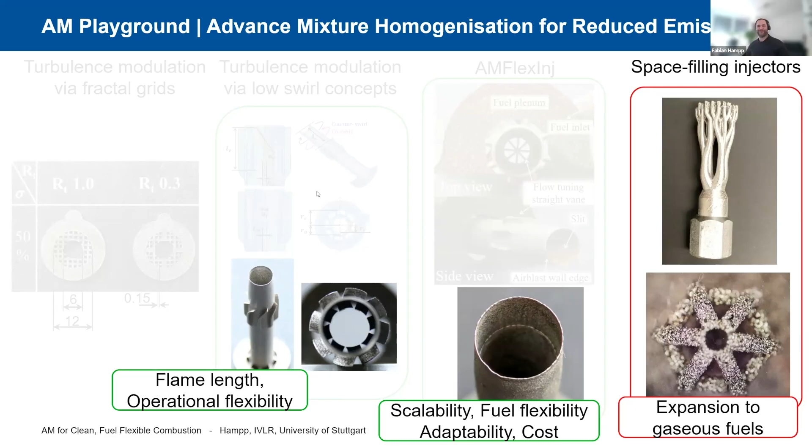Thank you very much for the opportunity. Speak to you soon. Have a nice weekend. Thanks. Yeah, same to you. See you. Bye. Bye.